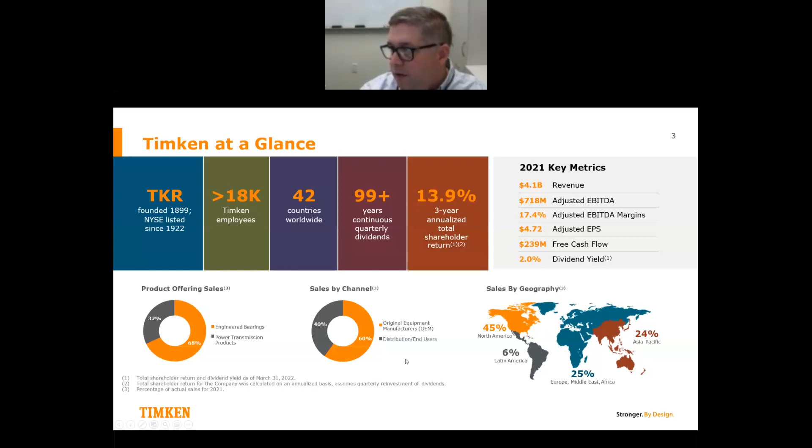Product offering, the pie chart there, mostly about 2/3 engineered bearings, 1/3 mechanical power transmission products, or what we're calling industrial motion products now, with a decent split between OEM and distribution or aftermarket type customers. About half of what we do is in Canada and the US, and the other half elsewhere in the world. So pretty North American centric company there, at least originally. We are expanding globally, though, of course.

As I just said, engineered bearings, rolling elements, and plain bearings. We recently acquired a company called GGB from Enpro, and they have a full line of metal polymer and other plain bearings that they offer. So we've just broadened beyond rolling bearings into plain bearings as well. And our industrial motion products are machine components of all types, from couplings to chain to belts to gear drive units to different repair services and so on.

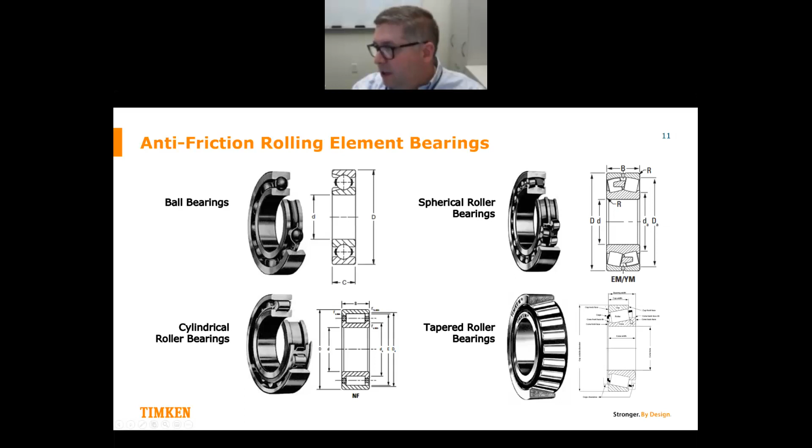Cylindrical roller bearings are just cylinder shaped rollers between two rings, and then tapered, as I was talking about earlier, have a truncated cone. So it's like a cylindrical roller, but with one end diameter larger than the other. And to accommodate that, you need to have a guide flange on the inner ring usually, and then an outer ring we call a cup. So the reason you have multiple types of roller bearings is because of application loading and speed considerations. Ball bearings can take medium to low radial load. So think about if this is an axle bearing the weight of the vehicle, and smallish thrust load because you do have some curvature to the raceway that can accommodate that thrust load.

But if you look at a cylindrical roller bearing, you could take big radial load, because you have line contact, which distributes the force across a larger area of contact. But again, very low thrust load capability because you don't have any constraining geometrical feature there in that outer ring to hold it. This is just one design. There are several types of CRB, of course. SRB, big radial load because of the line contact, higher thrust load capability, again, because of the curvature of the raceways. And then tapereds can do big thrust and big radial load.

The trade-off is in speed. So when you have line contact, anything that can handle high load generally has lower speed limits because you have more contact area and therefore more friction that could generate heat, versus balls where you have a point. So the ball's touching the raceway in a point in a standard deep groove ball bearing, for example.

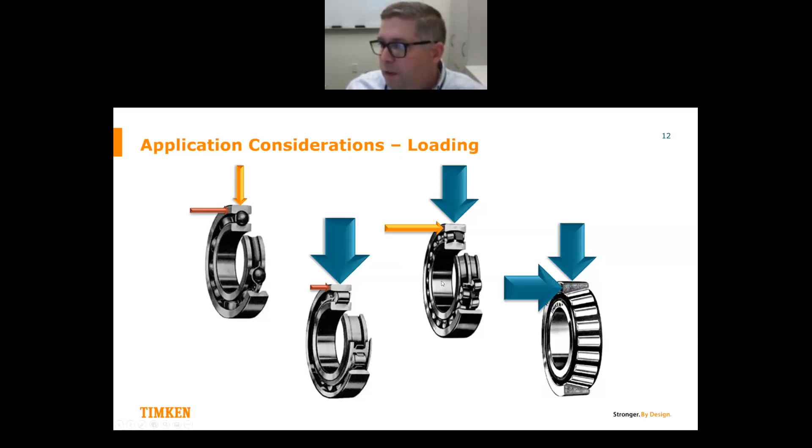A little more on tapered bearings since Timken made our name in tapered bearings originally. You can do multi-rows. You usually have the ability to do axial adjustment. So if I move this cup mounted in the housing just ever so slightly to the left of where it is now, I can control the load zone of what rollers are touching the cup and cone, and therefore the torque or the energy loss of the bearing. There's usually an optimal axial adjustment or setting, we say, but you can play around with that based on your application needs.

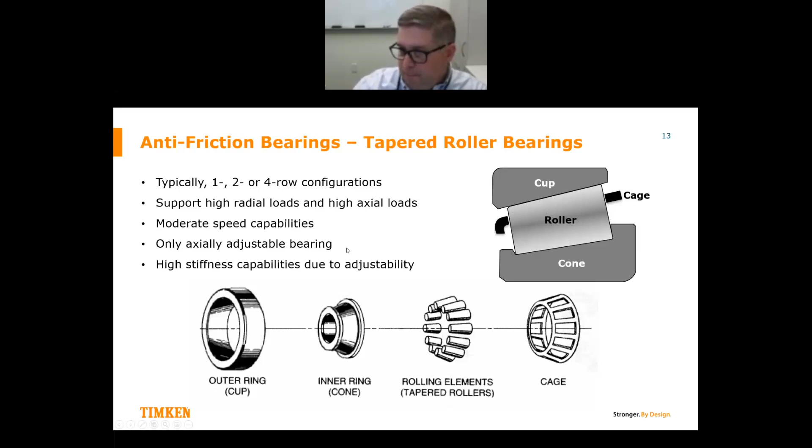And so, like I said, the adjustable setting here, by adjusting the axial internal clearance, I can adjust the load zone, and so how my load is distributed, and then the accompanying frictional losses of the product as well.

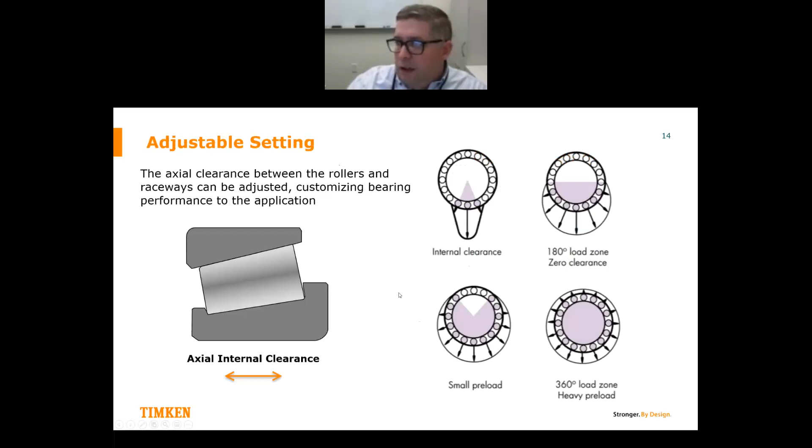I want to get into where some of these bearings are used in electric vehicles. Everyone's talking electric vehicles, and so I will do the same. When you think about battery electric vehicles, in the simplest designs, you have usually a low mounted battery pack, which adds a lot of weight. And you need to support that weight with your two axles overall. And what that requires is a higher gross axle weight rating.

So I now have a heavier vehicle due to my battery pack, at least today. I need to have bearings that can accommodate that at my wheel end. So wheel end bearing is the bearing that allows the wheel to rotate relative to the car itself. Earliest battery electric vehicles have poor energy density compared to gasoline, and so that's where the weight comes from. But we do see a future where they go to solid state batteries, the battery packs lighten up as the energy density increases and so on.

So you say, all right, I take out the gasoline engine, the transmission, and I go from a battery to motors and, like, say e-axles or small gearboxes to take the high-speed motor output to the wheels themselves. The fact that the battery pack's placed low in the chassis does change the center of gravity, so that affects the wheel end bearing designs as well.

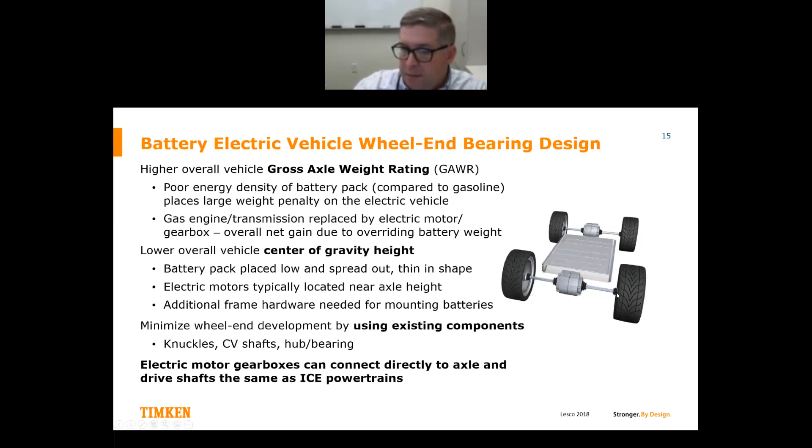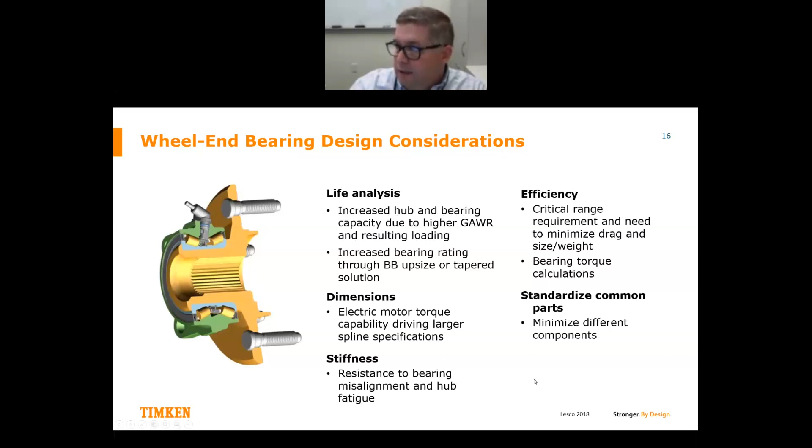You do have larger spline specs just due to the torque, the low end torque in electric motors. So we have to redesign the way the axle engages the bearing itself. And then, with the weight and the center of gravity, there's stiffness implications, there's efficiency implications. You want to minimize the size and weight of the wheel ends, but with power loss being a critical design characteristic that you need to optimize. And then standardized parts, which is kind of normal.

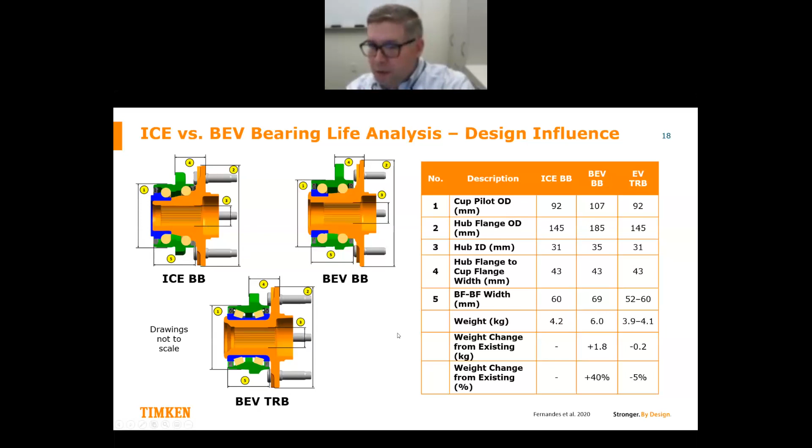Now the trade-off there is going to be in the efficiency of the bearing. I can handle more load, but as I said earlier, tapered bearings generally have more friction than ball bearings because of the line contacts. So what's good for load carrying isn't great for friction in a general sense. But with modern lubricants and other types of low friction technologies, we're getting closer and closer to that. So anyway, just a comparison to show you the wheel end thinking that goes into bearing design with some of these considerations.

The lubricant selection, we're talking greased bearings at the wheel ends. If you're taking higher load, you often need a different grease for a tapered wheel end bearing versus a ball bearing. Higher load carrying capability, sometimes higher viscosities, non-standard additives, antioxidants, and in some of the designs we're looking at, there's an independent wheel end motor right at the wheel. So in the previous example, that's an electric axle where you're driving an axle and then putting that axle through the bearing, turning the wheels.

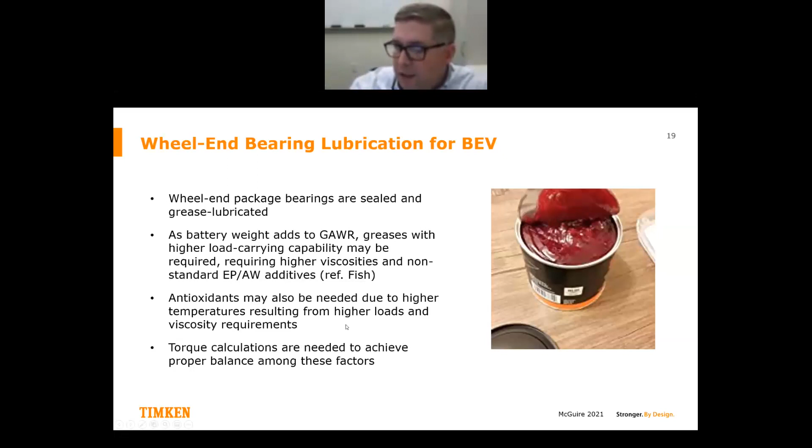This is where you have the four independent wheel end motors. You have the motor smashed right up against the final drive, usually a planetary, right by the bearing, and the heat from the motor can soak into the bearing itself. So the higher temperatures are real, and depending on the type of design you're using, that can have significant lubricant implications.

Going to the electric axle, so I was just talking about wheel ends, the bearing that allows the wheels to turn. The electric axle takes the rotation out of the motor and distributes that to the axle. The analogy there is a conventional hypoid gear differential in an internal combustion engine vehicle, where you'll have like 5,000 RPM top speed in your bearing and in some of these rotating joints, 75W-80, 85 type gear fluids, splash lubes. So you just put it in your axle center and it splashes around there. The housing's designed to encourage that. Operating temperatures in the 65 to 100 centigrade range, cast iron, and so on.

In some of these e-axles, though, you have a parallel shaft situation where you have the motor coming in driving a couple parallel shafts to a differential, which then go out to the axles. So helical gears instead of hypoids, much higher speeds, 10 to 20,000 RPM, ATF kind of lubricants and viscosity grades, which could be challenging as well. Splash. There are some dry e-axles that have grease lube bearings, so they're sealed and greased. Operating temperatures can be higher again because you're closer to that electric motor. Aluminum housings for light weighting.

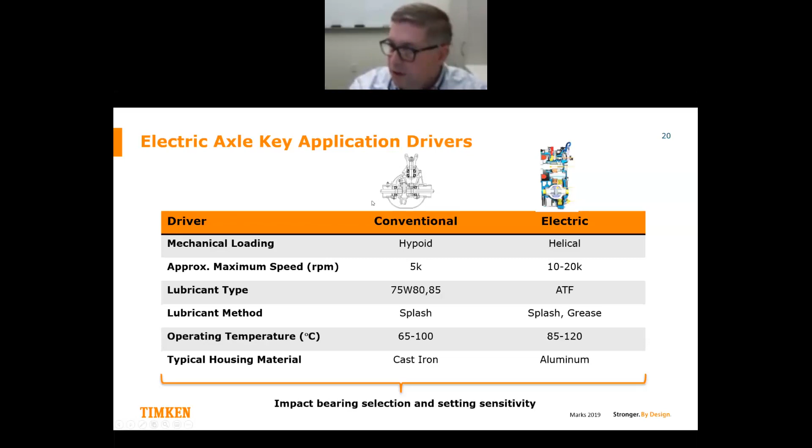So I won't spend too much time on this, looking at the time, but you can have these input shafts. So you have your electric motor spinning an input at pretty high speed that is connected by gear to this intermediate shaft and then to an output shaft with a differential in it. And then the bearing selection usually ranges from ball bearing for high speed through tapered bearing for more load and mixed loading conditions of thrust and radial load.

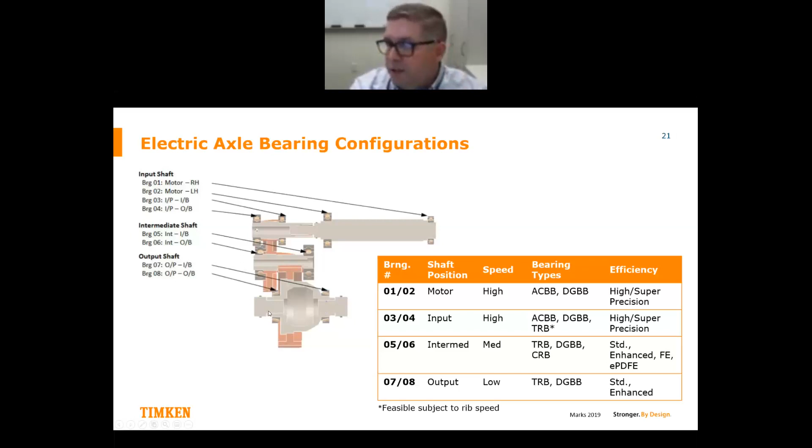So the challenges are real. You're moving down the viscosity chart in general. You're at high speeds in bearings. You're concerned about cage damage, usually thermal runaway if you have some loss of lube or damage. NVH, so noise, vibration, and harshness. In a quiet electric vehicle, you don't want bearings rattling around and creating vibration and noise. And then roller skewing and so on can matter as well. So you can generate damage to the roller ends, to the cage, if things aren't dealt with on the lubrication side.

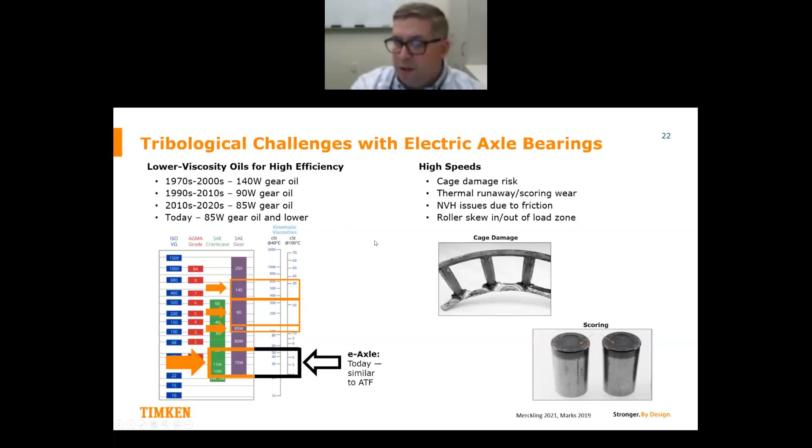What we've been able to show is that you can use in some of these positions tapered bearings. We call them EPDFEs. This is a bit commercial, but it just means a small tapered roller bearing, so I could use this little guy in place of this big ball bearing. Again, because I have line contacts for my loads versus point contacts there. And when you're doing bearing life predictions, that matters.

The concern then, as I've said earlier, is do I have too much power loss due to friction in this guy versus that? And we're able to show some cases where they're pretty comparable. Whenever you're doing torque predictions in bearings, it's always very condition specific. So there's no single answer there. But we're working with e-axle folks, and you'll see some tapered bearings in those going forward.

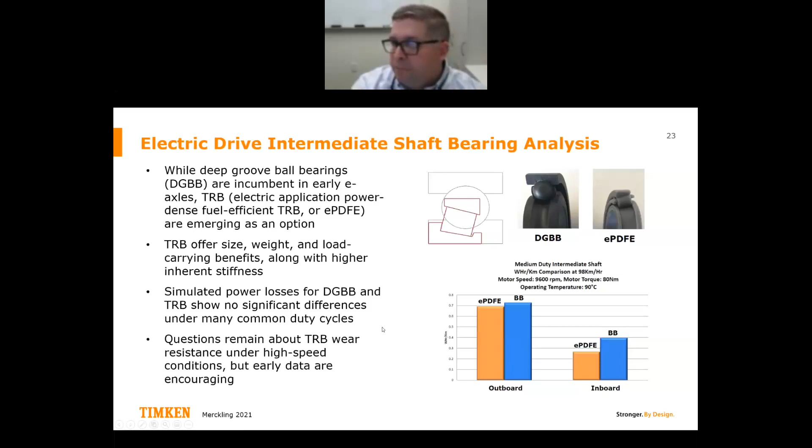Just a little more of a deep dive then into power loss in bearings. So if you think about a rolling element bearing, power loss is torque times speed. A tapered bearing is an interesting example of talking about friction. You have a lot of different contact points. So you have the roller contacting the outer ring, the inner ring, this cross section again. You have the roller touching the cage in a couple places. You have the cage touching a ring usually. You have the roller end in contact with this constraining flange on the inner ring or cone.

And if you break down the physics of all of this power loss, you have elastic hysteresis, you have full film lube, mixed film, boundary film, and then drag and churning bulk shear. The majority of the power loss in a rolling bearing has nothing to do with the sliding contact. So we're not all that worried normally about the roller touching the cage, even though it's just sliding. We're not even that concerned about the rolling element touching the rib or the flange compared to the roller rolling on the raceway.

So if you think about creating a hydrodynamic wedge, you're plowing through lubricant and then pressurizing that lubricant through that wedge between the roller and the raceway. And all that pressure and energy going into that creates frictional losses. So the majority of your frictional losses in a tapered bearing have nothing to do with the sliding contacts. It has everything to do with just the line contact between the roller body and the raceways.

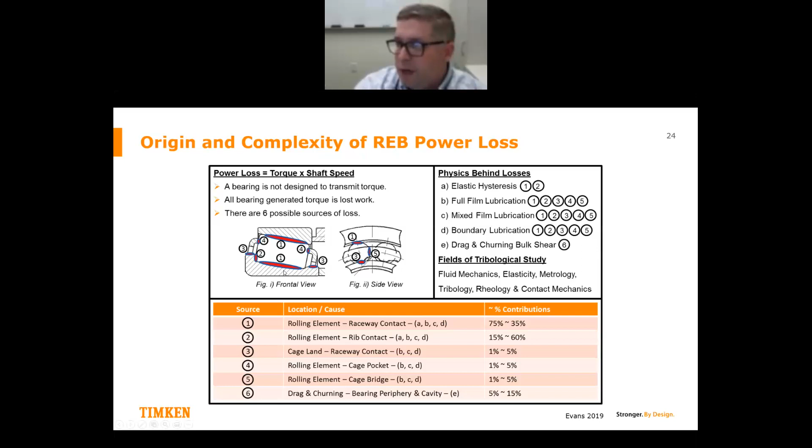So then you get into your standard Stribeck workup, where if I can have good film separation between my roller and my raceway, that's great. I can reduce overall friction, but lubricant shear losses can be significant. It's still mechanical work on that fluid to compress it, to pressurize it, and so there is some energy loss there as well. You get into boundary friction at the rib roller end contacts and so on, but again, they tend to be in aggregate less of an energy loss than just the roller raceway contacts.

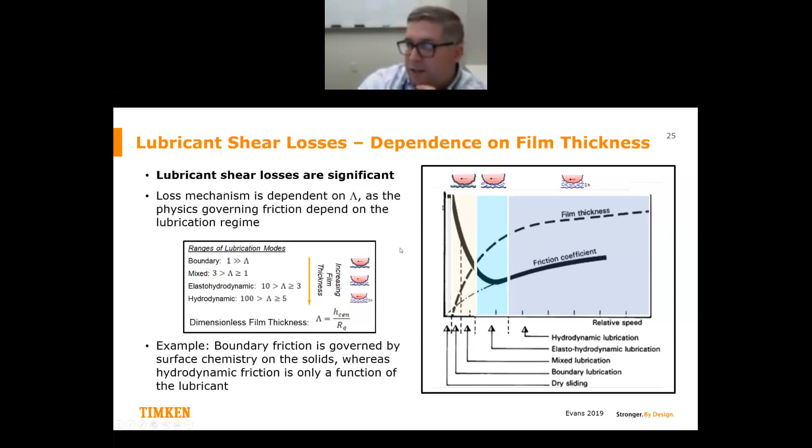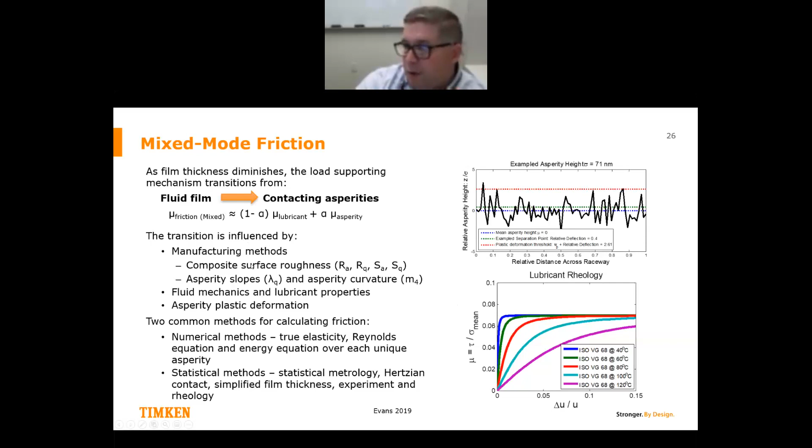Mixed mode friction is an area that's super critical for electric vehicles in particular, because now I'm using lower viscosity lubricants, and so the contacting asperities play a significant role in the amount of friction that I'm generating in my contacts. There are numerical, statistical ways to calculate this. This is a bit of a busy slide, but we have ways that we can predict mixed mode friction in our torque models. And then the last piece of this is the lubricant itself, or the fluid itself.

So the majority of the EHL models that are out there, the elastohydrodynamic lube models for bearings and gears, high pressure contacts in general, are not taking into account in any real measurable or quantitative way pressure viscosity behavior. Now you do have usually a pressure viscosity coefficient, which is usually like alpha, or they call it PVC. That's usually approximated for most calculations.

When you start to design bearings and lube systems for very specific, high performance, high efficiency type applications, you really need to measure the pressure viscosity behavior over a range of temperatures and pressures, and then you also need to measure the viscosity influence of shear on the system. So most of the earliest models didn't have high shear behavior modeled in there as well.

So what we do is we measure viscosity at high pressure and temperature, which allows us to get accurate pressure viscosity coefficients and models. We then have a high shear viscometer, which allows us to impose high shear on the lube and then measure viscosity. We measure limiting shear stresses, and then combine all these three things to create lube rheology models that allow us to integrate shear stress over EHL in these roller raceway contacts.

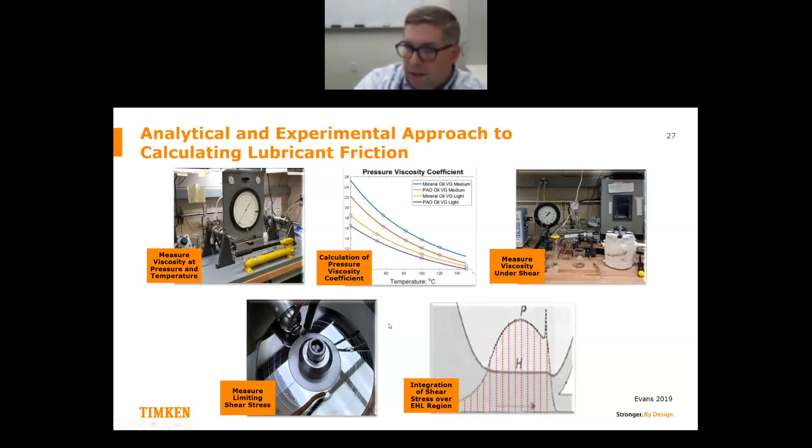So there's a lot of behind the scenes stuff that we're still working on and developing. I will say the aerospace world has been most aggressive in employing these types of techniques, but still a lot of opportunity there. And when you do that, when you use these types of backgrounds and models, and I won't get into this, you can really narrow your prediction of bearing torque, or torque being the power loss, the amount of torque that's lost or required to turn the bearing.

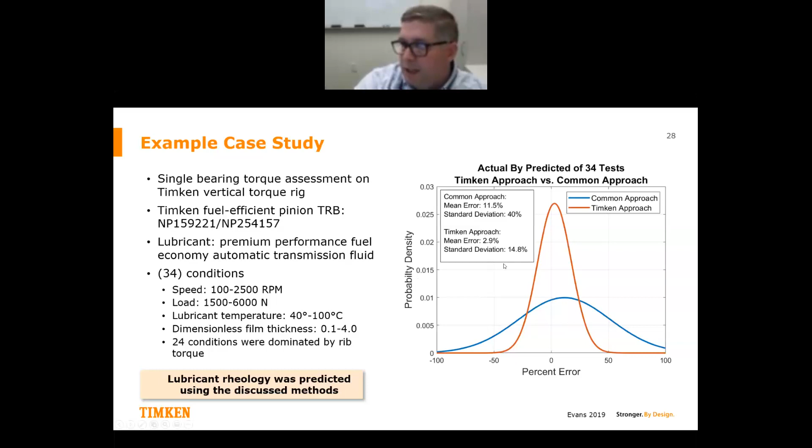So we have some other publications on this. We could follow up later if you'd like, but we're really trying to push the state of the art in the fluid mechanics piece of this.

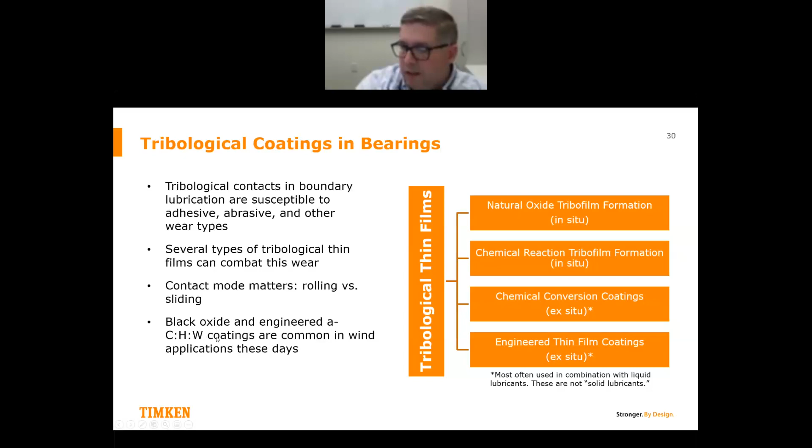And then coatings, you get into, there's all kinds of thin films that matter. Natural oxides will form. You have reaction tribofilms. You have chemical conversion coatings. This engineered thin film coatings is where we intentionally will deposit like a diamond-like carbon or an amorphous hydrocarbon with tungsten in it. These are in most wind turbines you see in the world now.

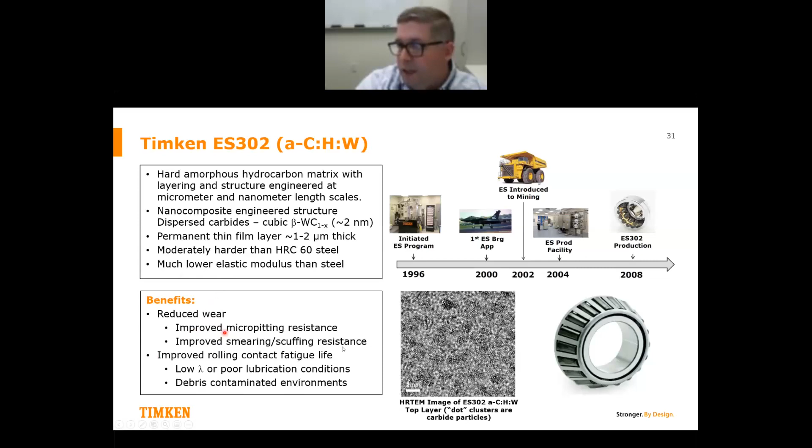In particular, the tungsten DLCs that have this nanostructured thin film layer. They're only 1 to 2 microns thick, and they're nanocomposite engineered dispersed carbide type structures. So it creates some lubrication opportunities as well, and allows you to get in and improve micropitting and smearing resistance, for example.

Okay, so just on the bearing side now, and I don't have as much material on the industrial motion, but just to wrap up the bearings, battery electric vehicles, exciting new development area for the world of bearings and lubricants. Increased axle weight ratings, lower centers of gravity, e-axles with high speeds, very low viscosity lubricants. These are all really driving a lot of decision making, kind of basic decision making around bearing selection and design.

We're trying to improve our ability to do that with modern rheological methods and so on, and then application of coatings where appropriate as well. So, pictures of e-vehicles, certainly main shaft turbine engine bearings and wind turbines, some of the hot R&D areas in the bearing world right now.

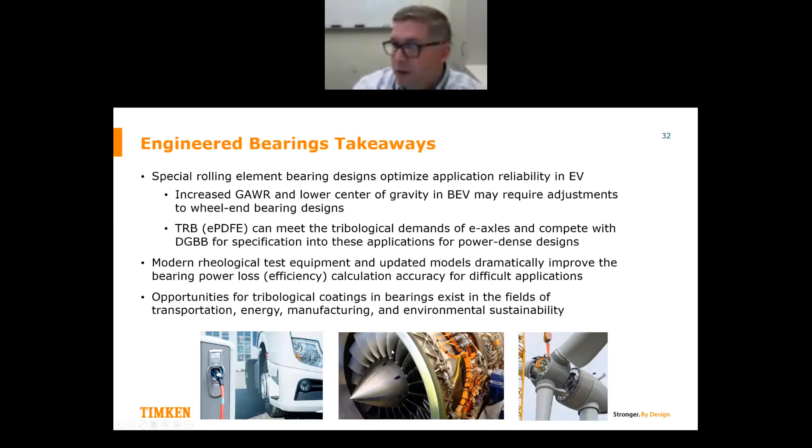Going on to industrial motion here for the next 5 or 10 minutes or so. Robotic material handling, we call it lights out or dim lights manufacturing. So I could just turn the lights off in the factory and it'll keep pumping out production without people. Lean flow processes, material utilization, waste reduction. These are all things that are driving decision making and design of manufacturing automation solutions.

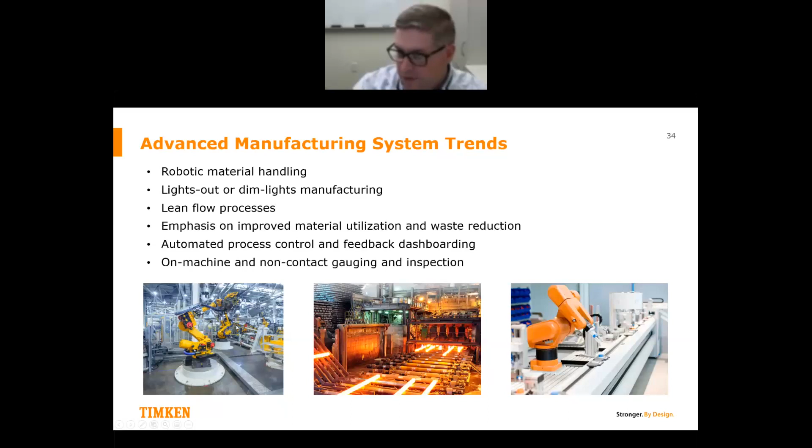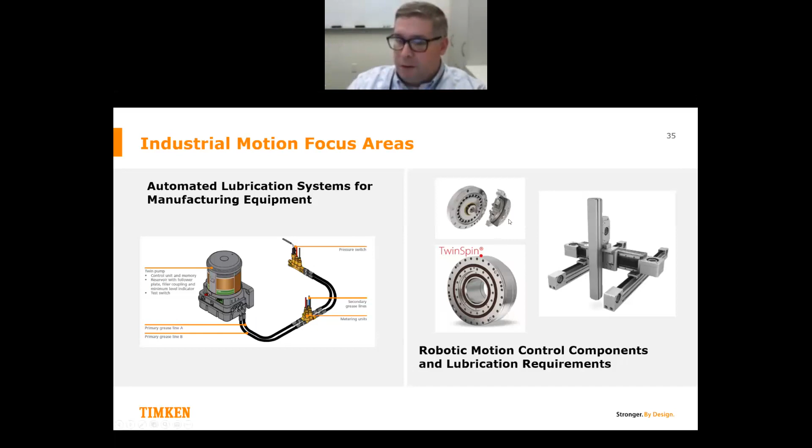Just in this brief little talk, just a few words on automated lubrication systems for manufacturing equipment, and then robotic motion control components. You think often about rolling element bearings and gee, I gotta oil or grease those. Same with gear drives. You got some little widgets here in these really high precision gear drives that are requiring lubrication as well, although they're easy to forget about because they're often little package sealed units. So I want to spend a minute or so on that as well.

You'll find automated lubrication systems everywhere in machinery. In this, the pump automatically applies lubricants to equipment bearings. It eliminates labor, improves reliability versus fighting with the grease guns and so on, like we were talking about earlier. The other thing is that an advantage in this is that you're injecting the lubricant while the bearing is being used in a lot of cases. So it actually entrains the grease into the bearing better than shutting everything off cold, squirting it in, and then starting it up all at once.

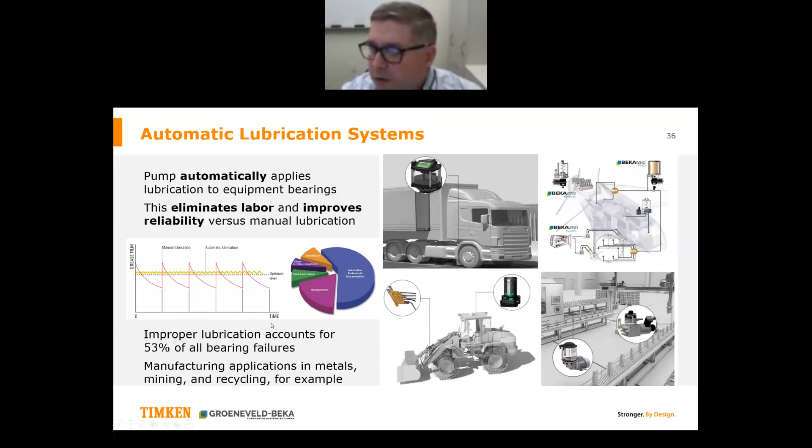So you kind of meter in the lubricant as you go, and you can kind of keep closer to that optimum level as the rotating bearing actually helps lubricate itself versus, again, kind of a cold greasing or something. So you can get to increased efficiency, higher productivity, and decreased maintenance overall. Ideally, you want your bearings to run without any issues, and this takes a lot of the human error out of it. However, 80% of all greasing points in the world are still manual.

So there's still a need for STLE to work with people that do this work. We're just saying that there are specific cases and end uses where you can automate some of that and turn your lubricant experts on to other more challenging issues than having to do the grunt work directly.

These systems can be configurable to application needs, from 000 to NLGI 2, across all kinds of ranges of temperatures and pressures and flow rates. Multiple point lubes, single point lubes. There's a lot of variation there. And so the systems are often designed to the application directly rather than being an off the shelf kind of a thing.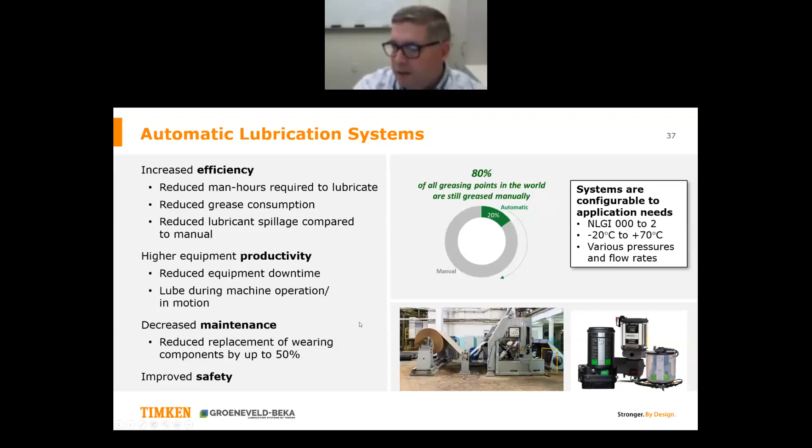Industrial robotics. So we acquired a company called Cone Drive that makes strain wave gearing or harmonic gear units, usually in lighter duties, pretty significant reduction ratios. Acquired a company called Spinea that does cycloidal reduction gearing, usually heavier joints, more load bearing, and then robotic transfer unit linear bearings and linear motion bearings are another component of this as well.

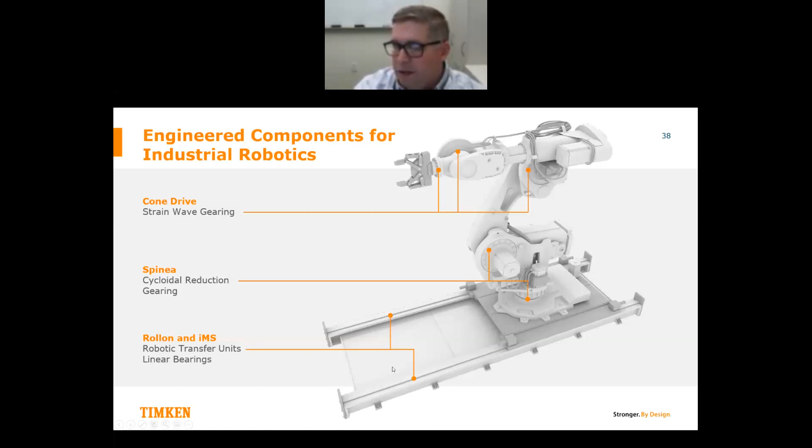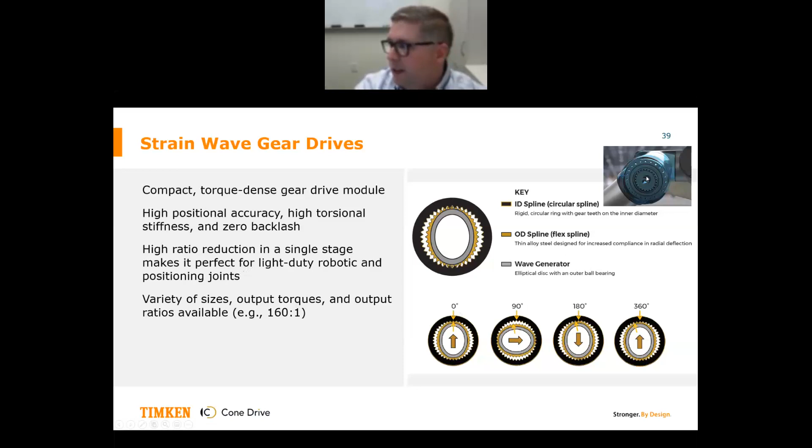In strain wave gear drives, you have a gear drive module. It's kind of like a spirograph if you think about the toy, where you use a wave generator with an elliptical geometry that as it rotates around this flexible spline, engages one tooth over per turn. And so that's how you can get pretty big output ratio changes from 160 to 1, for example. You'd have like 160 teeth there and so on. So it's a very mechanically interesting thing, and it's a very compact unit as well.

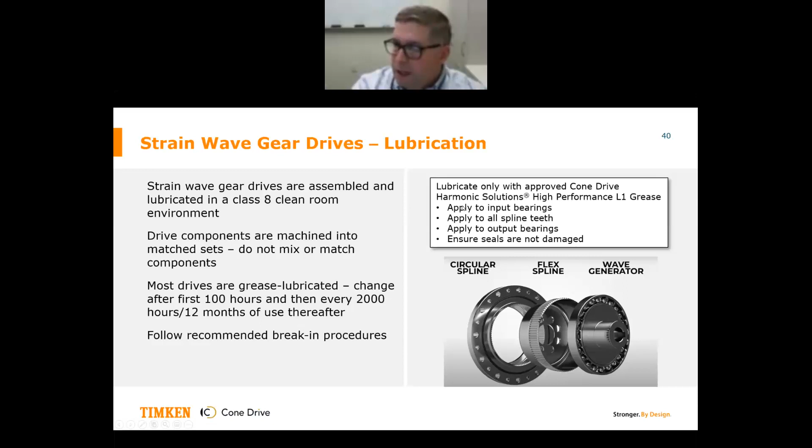If you have these and you come across them, they do require special lubrication. The factory will lubricate them in a Class 8 clean room or better. The components are all match sets, so you don't want to pull the thing apart into 1,000 pieces and then try to put it back together because you're not going to set it up the right way. So the advice is to look to the component manufacturer for the lubricant requirements. For the ones that we produce, we have only an approved grease that we use. We don't encourage greasing with whatever you have in the shop. And then we ask that you follow our processes and procedures pretty closely on those.

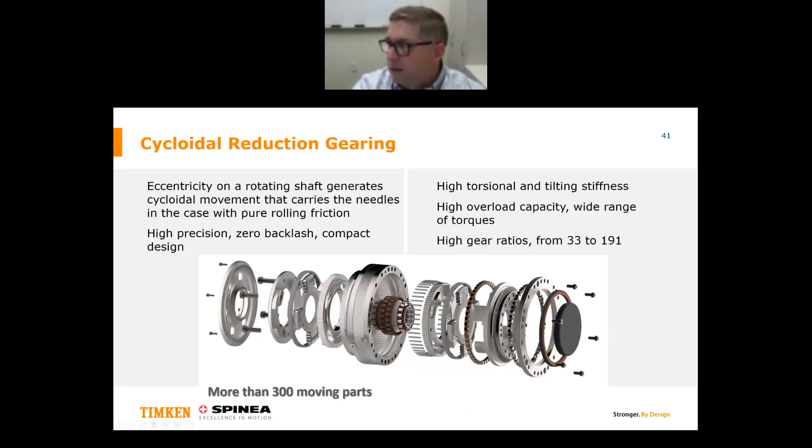The cycloidal reduction, so the heavier duty ones are not much different in terms of complexity. You have a lot of little bits and pieces and rollers and teeth and rotating components. It also uses eccentricity on a rotating shaft to create a cycloidal movement and kind of meters the output around. You can get up to pretty high gear ratios with these as well. Very high precision, zero backlash, all kind of ground finished components and little bits and pieces in there. And so, more than 300 moving parts in that example.

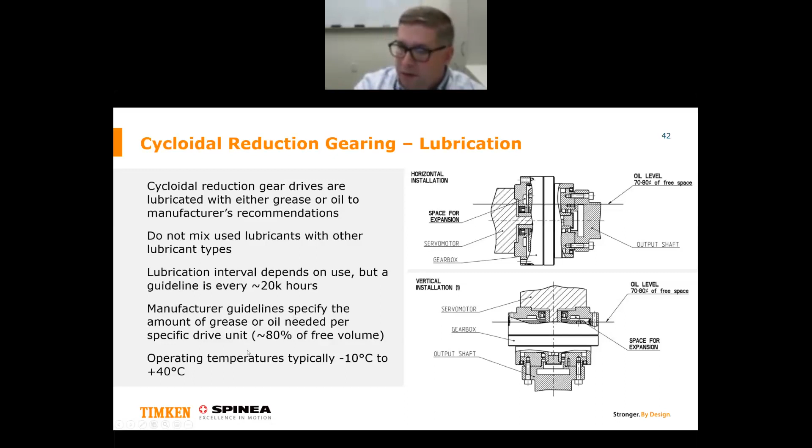These can be lubricated with grease or oil, though. They're a little less picky than the harmonic gear units. This is like a horizontal. You can have an oil level, gives you an oil 70 to 80% of the free space. Vertical installation has a similar kind of guidance. Manufacturer guidelines are key, of course. But again, you don't want to mix lubes and get too crazy with these things either.

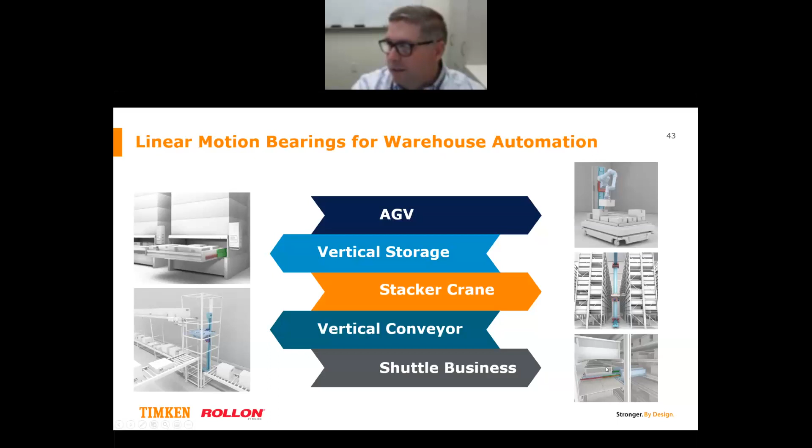And then we always forget about linear motion. Like, how often do you grease the bearings in your desk drawer sliders? But okay, scale that up to industrial robotics. Now you got big, heavy, expensive equipment. You want to grease those sliders and so on. So everything from these autonomous vehicles to vertical storage units to stacker cranes, conveyors, shuttles, they all have these kind of linear units. And if you get in and look at it, you have a bit of a diversity in the types of lubes you would use.

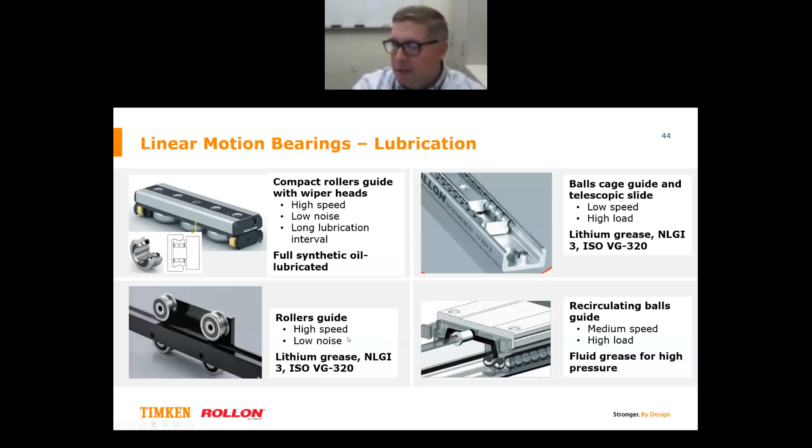Full synthetic oil for certain compact roller wiper heads. You have these kind of recirculating ball guides that use fluid, you know, NLGI 00 or whatever grease. This is just a more standard lithium NLGI 3, with a higher viscosity for telescopic slides. Rollers have different requirements as well. So again, this is not to say this is the way you always do it, but don't forget about this stuff. It needs lubed as well.

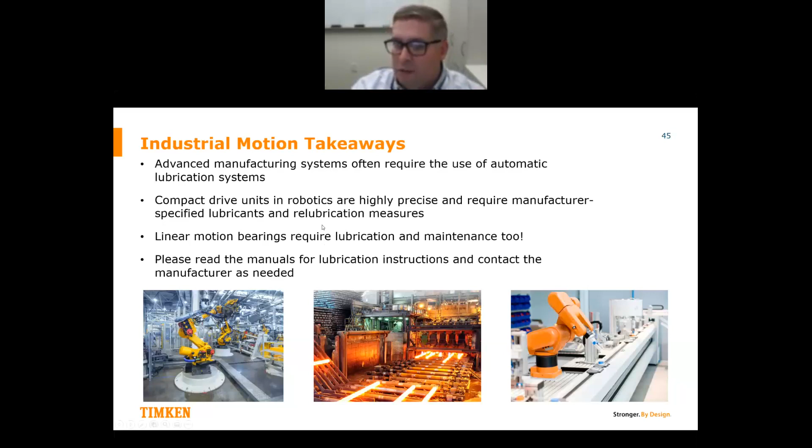And I'll wrap it up with that. So, you got some pretty interesting mechanical designs in some of these compact drives and robotics and so on. They need to be lubed, but usually not with just one lube. You have different lubes and different lube requirements for these sealed units. Linear motion bearings require attention as well. And then lastly, if you have a place that's hard to get to or unsafe to get to, or you need to take advantage of some of the benefits of the auto lube systems, there are a lot of companies that can do that and can work with you on that as well. Okay, so that's the end of the technical stuff.